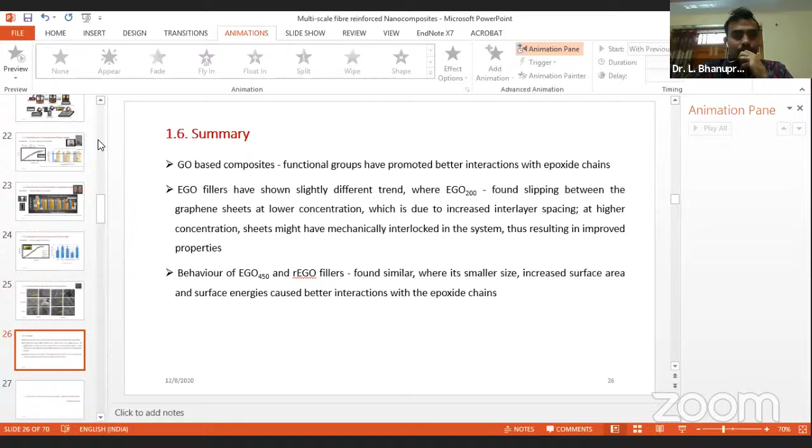I hope I am audible, sir. Yes, sir, you're audible. Okay. Let me share my screen, sir. Is my screen visible? Yes, sir, your screen is visible, we can view it. Okay, so I can go ahead, right?

Yes, sir. So, a very warm welcome and very good morning to every participant. Myself, Dr. Bhanuprakash, and in today's session I will be talking about multi-scale fiber reinforced nanocomposites, especially targeting structural applications.

I hope in yesterday's talk, in the beginning talk, you might have already covered composite materials and their fabrication, different fabrication methods, and all.

I'll be taking you into the research aspects of these nanocomposites, and the possibilities that we have for undertaking research in this particular field, especially looking at structural applications. I'll give you a brief introduction about composite materials, which I hope will be reinforcing your knowledge.

Let me start with the fundamental definition. What is a composite? A composite is a material that is a combination of two or more dissimilar materials which are intimately bonded to form an integrated structure. It's a physical bonding between two dissimilar materials that allows them to form into an integrated structure, which we call a composite material.

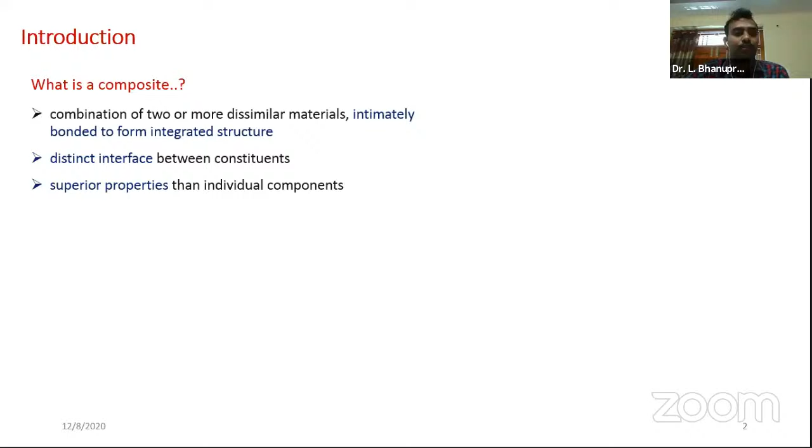That's why we prepare composites. Even if a material individually doesn't have a particular property, when combined with another material, you can achieve that property, so overall the composite will have superior properties than the individual components.

If I show you a microscopic image of a fiber reinforced composite, you can clearly see the binding material, that is the matrix—here a polymer matrix—and the reinforcement, which is the fiber, clearly evident. This reinforcement fiber is bound within a continuous medium called the matrix material, which is a polymer resin. This is a microscopic image of the fiber reinforced polymer composite system, where you can clearly distinguish the individual components—polymer used for binding the reinforcement fibers, forming an integrated structure from two dissimilar materials.

The key point is that the bonding involved here is physical bonding—there are no chemical bonds present in this system. We know chemical bonds are stronger compared to physical bonding. In most composite materials, we can only expect physical bonding between the materials, and wherever chemical bonding is possible and realized in the system, that system will definitely have superior properties or a greater increment in properties.

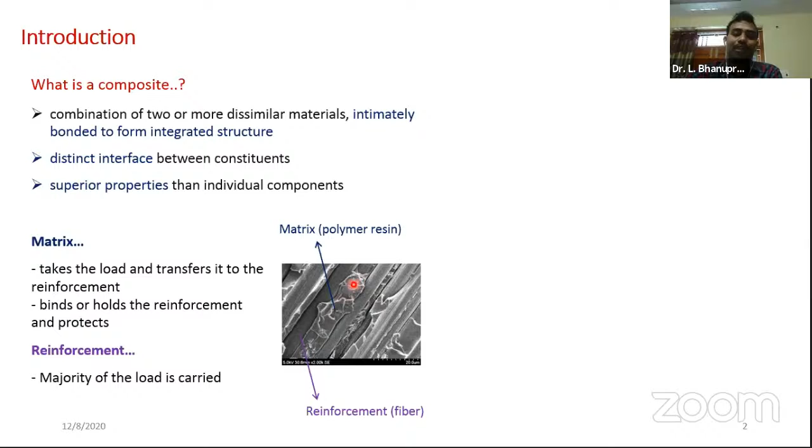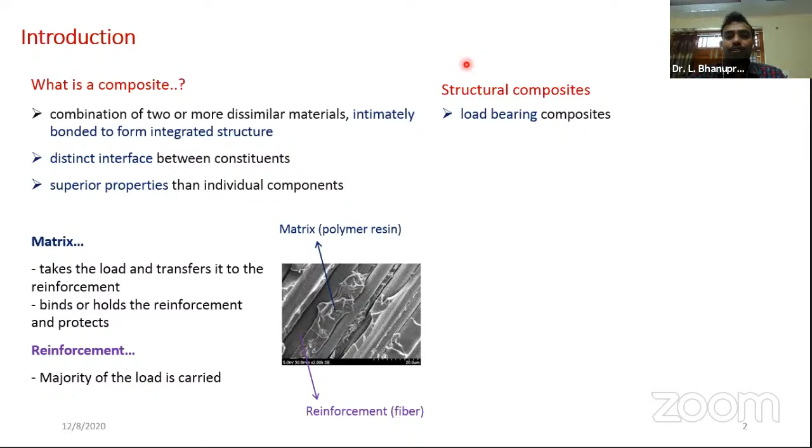And we are talking about their structural applications. So structural composites is nothing but the composite system which takes the load. So whatever the load bearing composites we can say, that is a structural composite system. So I can give you the best example, that is deployable military bridges.

Military people, if they find any obstacle like a river that they have to cross, what they do is use these kind of foldable bridges which are carried over heavy trucks, so that will be deployed at the location, and eventually all the military vehicles will be passing over these bridges. So such a bridge should definitely be lightweight, and also very strong enough to withhold the weights of all these military vehicles.

So there is always a possibility, always so many research opportunities to develop materials which are lighter in weight, and which are very strong in nature. Composites will give you, to some extent or a greater extent, solutions for these kinds of applications. So that's why we use composites.

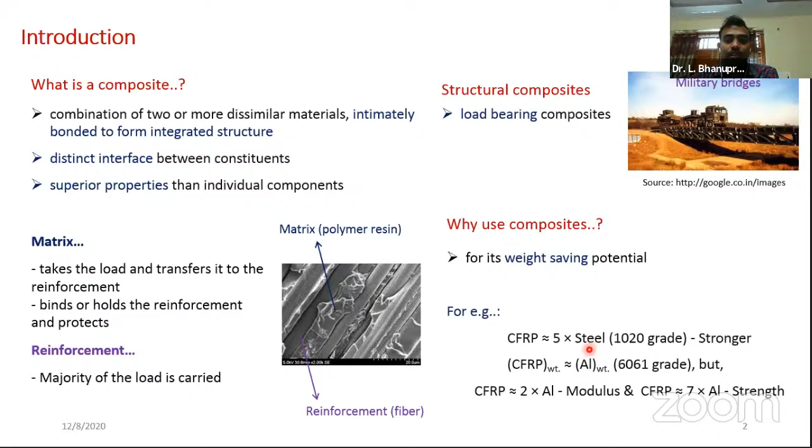So what is the beauty of these composites? The beauty of these composites is its weight saving potential. These composites are very light in weight, and there is no compromise on the strength. If I give you an example, CFRP, that is carbon fiber reinforced plastics - carbon fiber reinforced polymer composites have strength 5 times stronger than steel, 1020 grade steel.

And when you look at the weight aspects, it is comparable with aluminum weight. We know that aluminum is very light in weight. So CFRP composites have very light weight, comparable to aluminum, and in strength aspects it is 5 times stronger than 1020 grade steel. Similarly, comparing properties with respect to aluminum itself, it has 2 times the modulus of aluminum and also 7 times stronger than aluminum material. That is the beauty of these composite materials - a very great weight saving potential in engineering applications.

So if I move on, you know composites is a combination of 2 or more materials, having greater weight saving potential, and it can be used for structural applications. So when exactly can you think of using these composites? We cannot derive these composites into each and every engineering material, we cannot replace all engineering materials with a composite system, because there are many other aspects to consider. I'll come into that.

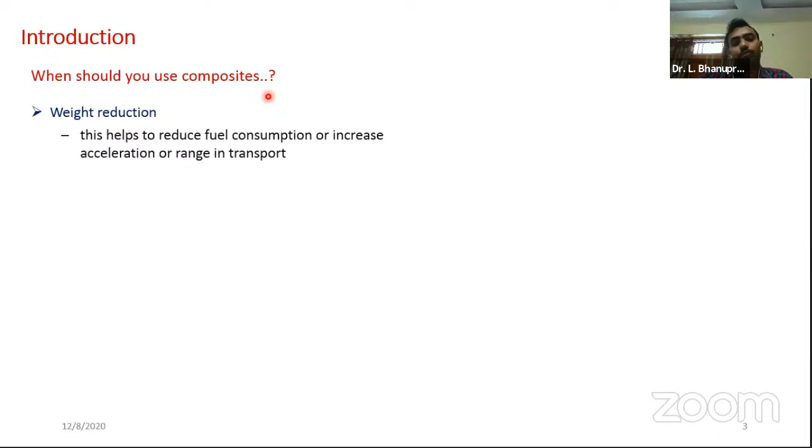So when exactly should you think of using these composites? If I say a few things which are very critical - one parameter very critical in your application is weight reduction. If weight reduction is very critical in your engineering application, then you can think of using these composites. The area where weight reduction is particularly critical is the aerospace sector, and also space applications. This helps in reducing fuel consumption, so it increases the range in transport, or increases the acceleration of your vehicle.

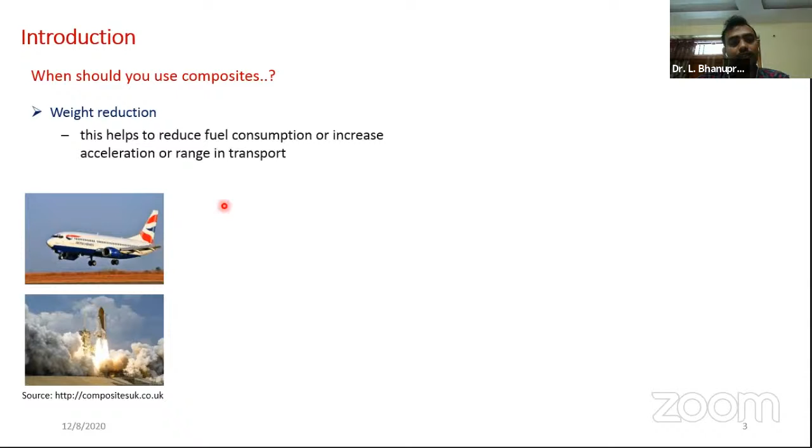The main advantage we get is these panels are ready-made. At the industry, you can fabricate it in a very quick interval. And also, if you're making concrete-based structures, you have to work much more on the digging activities.

The foundation activities are heavy, depending on the structure, depending on the number of floors and all. So here, severe digging and foundation works are not required because it's light in weight materials. Even today, this building is there. If you happen to visit IIT Madras, I'll recommend visiting this building as well. This is one area where weight reduction is very critical, so you can think of using composites.

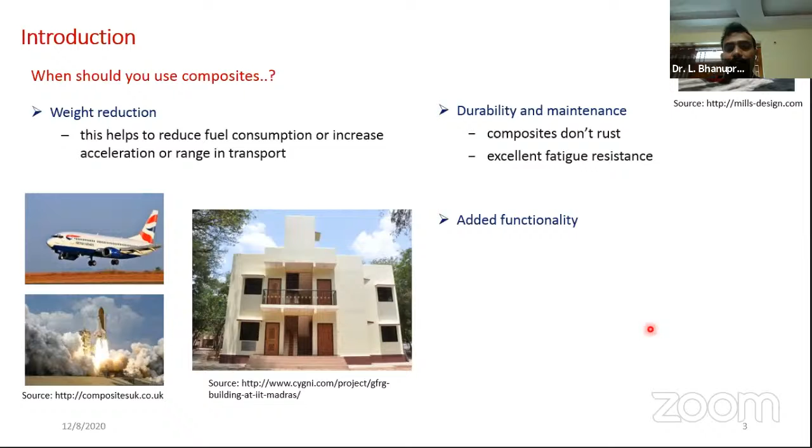Another area is where you're looking at added functionality or multi-functionality to your system. One example is radar applications like stealth aircraft. If you want your aircraft to be invisible, as well as strong and lightweight, you can use composite materials that absorb radar signals. You can incorporate such materials into composites to get radar invisibility. Thermal insulation and electrical insulation are also achievable in this system. So such added functionality you can give to your system, and if you're looking at multifunctionality, you can go with composite materials.

Last but not the least is design freedom. We will have architectural freedom, so you can design your strength in a particular direction. If you want stronger tensile properties in a particular direction, you can orient your fibers in that direction and achieve that. If you clearly know the dynamics of your system, you have the freedom to architect your material. That is the beauty of these composites.

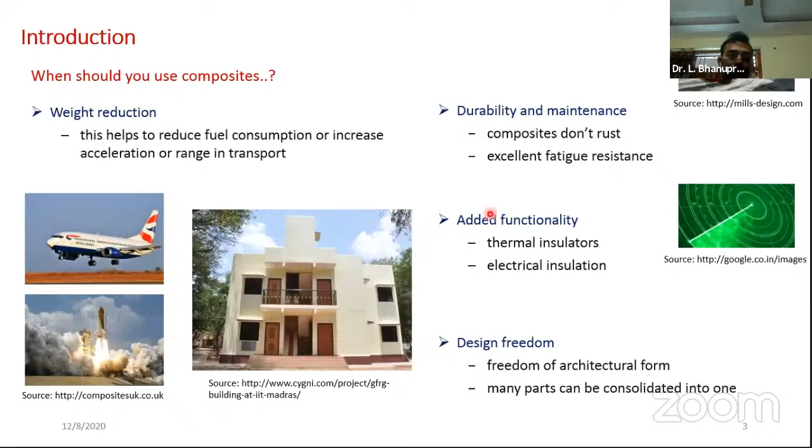So am I teaching you something new? I don't think so. These composites exist in many forms in nature. If I give you a few examples, the best one is wood. Wood is a composite system, a combination of lignin and cellulose material. Lignin and cellulose combine to form wood. So this can be called a composite system.

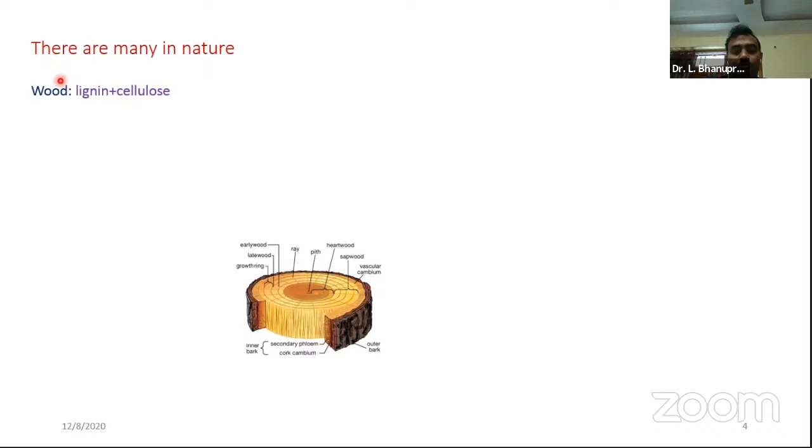Our bones are also a composite system, where bone cells are combined with calcium-based minerals, getting integrated into a structure with good strength. Bones are basically made out of bone cells and calcium-based minerals; altogether these form a composite system. In fact, our human body itself we can call a composite system, made out of tissues and bones. These tissues and bones have physical bonding or binding, but not chemical bonding. So we can call our human body itself a composite system.

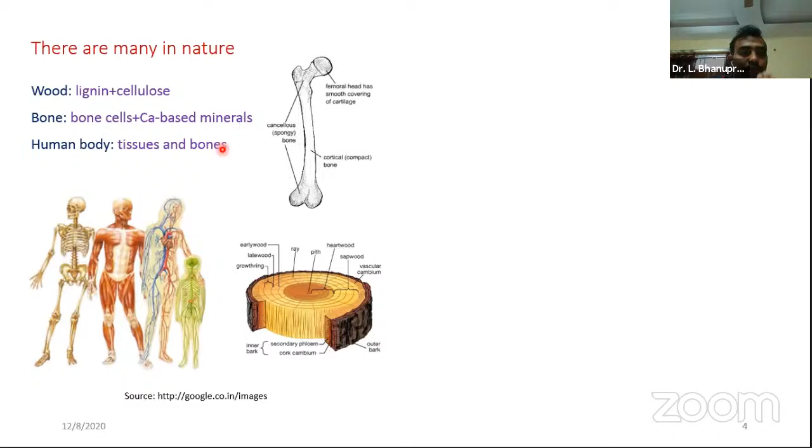So what we are doing is observing nature and trying to mimic it in engineering applications. We are trying to imitate this in all kinds of engineering sectors, starting with construction, transportation, marine, aerospace, energy—virtually all sectors of engineering—we are imitating these composite materials.

Two examples I would like to give you. One is a recent aerospace vehicle, the Boeing 787. On the Boeing 787 website, they clearly mention that 50% of the material they use is advanced composites, so half of its material is fiber reinforced composites.

Depending on the area, wherever mechanical properties are dominant, whether tensile property, compression, or toughness needs to be very high, accordingly we select different types of fibers and add them. But altogether, advanced composites account for 50%.

So half of the materials used come from the composite system, 20% from aluminum, 15% titanium, and 10% steel, especially for landing gear applications. The remaining plastics and other materials make up 5%.

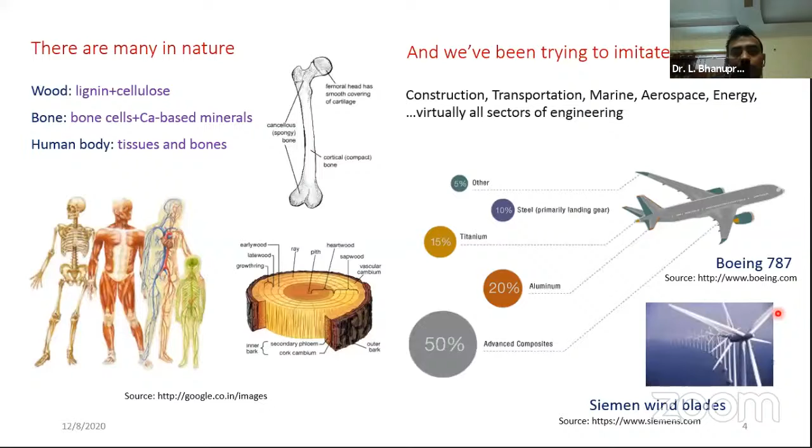Moving ahead, I'll quickly give you the classification of composites. We know a composite is a combination of matrix and reinforcement. Based on the matrix we can classify composites, and based on the reinforcement we can also classify composites. Based on matrix: organic matrix composites, metal matrix composites, and ceramic matrix composites. Under organic matrix composites, we have polymer matrix composites and carbon matrix composites.

Common metal matrix composites include aluminum as the continuous medium, or titanium, magnesium, copper alloys - all can be used as matrix. Into this matrix material we add reinforcement material, so the matrix properties are further improved by adding these additional materials called reinforcements.

Similarly, for the ceramic matrix, oxides and nitrides or carbides are considered - aluminum oxide, silicon nitride, or any carbides can be picked.

Before discussing polymer composites, let's see classification based on reinforcement. We have particulate composites, where the reinforcement is zero-dimensional, that is particles. If you use particles as reinforcement, we call these composites particulate composites.

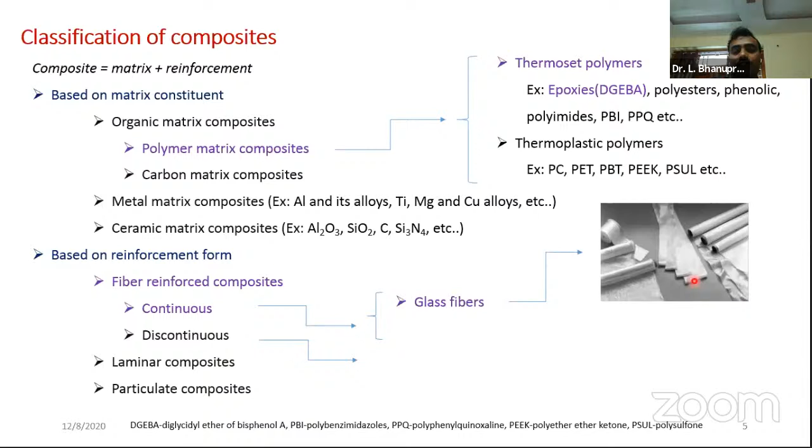Coming to fiber reinforced composites, in most cases for structural applications, continuous fiber is used, whether unidirectional, bidirectional, or three-directional. If it's glass fibers, these are glass fiber sheets or mats you can see.

Carbon fibers will look something like this - it's a two-dimensional or bidirectional carbon fiber, oriented in two directions perpendicular to each other. If it's unidirectional, all fibers are oriented in one particular direction - there is no fiber coming in the opposite direction, at 90 degrees.

We also have a system with discontinuous fibers, called chopped fibers. All these chopped fibers are stacked into one layer, so we call it a mat, or chopped strand mat.

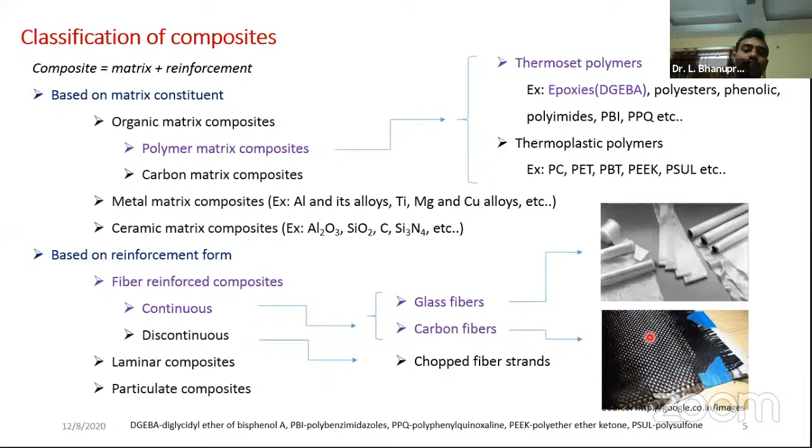These chopped strand mats are expected to have homogeneous properties, but not the continuous system - there, depending on the direction of the fiber, properties will change. If all fibers are oriented in one particular direction, X or Y, the properties in that direction will be very high, but not in the transverse direction. This depends on which type of fiber we use, which depends on the end application - we have to pick the material accordingly.

If you see the fabrication of composites, we have both conventional methods as well as advanced methods. In the conventional methods, I can say we have contact molding or press molding. Under contact molding, a very old and easy technique is called hand layup technique.

We'll be just laying up the fibers, and each fiber, when you lay it up, will be poured with the resin or matrix polymer material, and we'll be rolling it and forming it into the shape of your chosen mold. So it is a very simple process.

Hand layup technique, and spray up is just an automated fabrication method compared to the hand layup technique, where the resin and fiber both will be sent through a pressurized channel.

There is a pipe sending the pressurized resin, and there is a scissoring system as well, where fiber tows will be chopped using the chopping gun. This chopped fiber along with the resin will be sprayed onto the mold surfaces. According to your desired thickness, we'll be applying this resin-fiber system to get the end component.

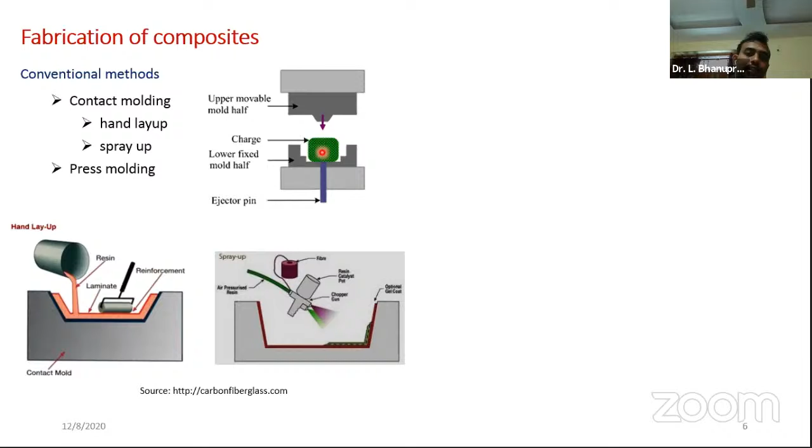And the last one is press molding. We have the female and male mold components. In between, we'll be placing the polymer resin along with the fiber system combined. We'll be applying pressure, and we'll eventually get the end products.

Advantages of these conventional methods: we have easy processing. The steps adopted are very simple and straightforward, and we don't require any trained professional for getting components out of these methods. And these use low cost tooling. No heavy tooling is required. All we are using is low cost tooling.

So these are the advantages we can get, but there are many limitations as well. Mainly, laminates tend to be resin rich. There is no control on the resin that we are applying. Resin is nothing but the polymer matrix.

We know that the ultimate load carrying element in fiber reinforced composites is the reinforcement fibers. The matrix is just a binding material, and it is weak in its properties, so this binding material shouldn't be very high. If you give more binding material and apply the load, this binding material will fail first before it effectively transfers its load to the reinforcement fiber. So before it even transfers the load, it takes a greater amount of strain and fails first before the fibers.

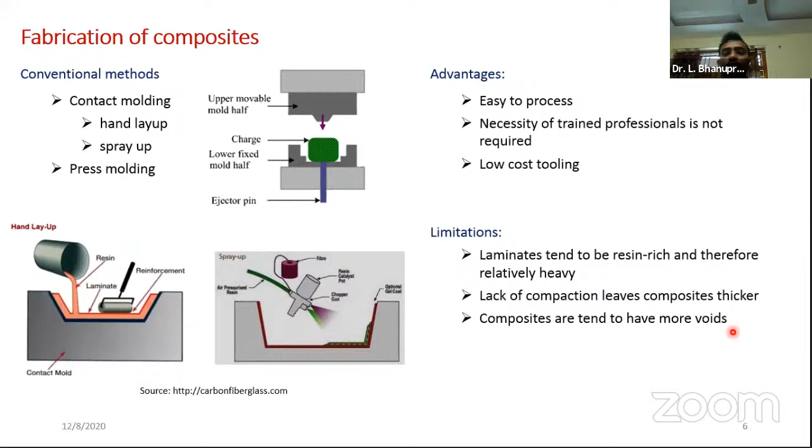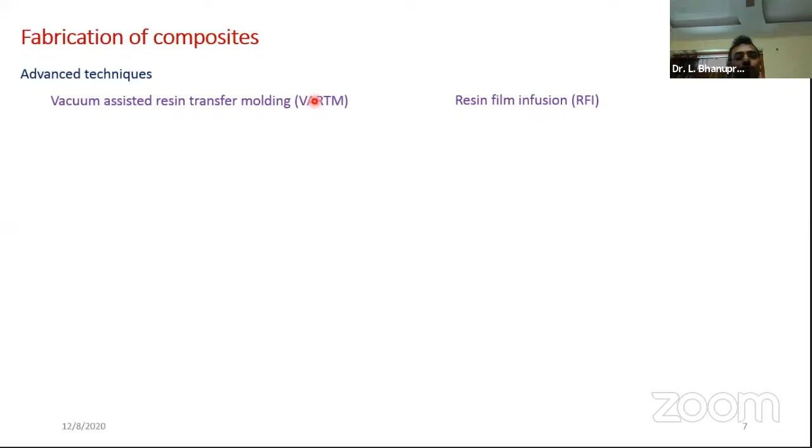And if you go with advanced techniques, we have two I'm going to talk about: one is vacuum assisted resin transfer molding, the other is resin film infusion process. In vacuum assisted resin transfer molding, as the name suggests, the resin will be transferred here. According to our desired thickness, we stack the fiber, and then we seal the material.

This is a vacuum seal. So what we do is we do the two pipings at two ends of these fiber mats. One of this passage will be linked to the resin, that is the polymer matrix, and the other one is to the vacuum pump.

So we create a pressure gradient between one end of the fiber to the other end. If this passage is open to atmospheric pressure, then this end will be at negative pressure, that is vacuum pressure. So a pressure gradient is created, and because of this, resin will be transferred from one end to the other end. So it is basically a vacuum driven resin transfer molding process.

During this process, whatever air is trapped between the fibers will be pushed to the other end point, because smoothly all the resin will be coming from one end to the other end. So wherever any air is present, that will be taken care of by this vacuum hose.

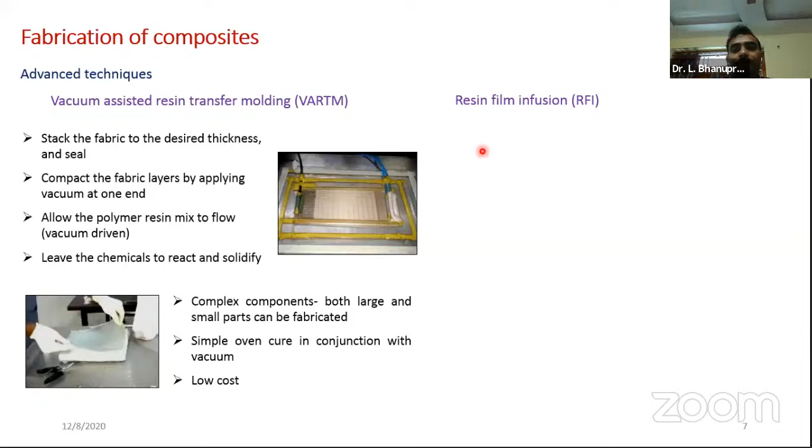When it comes to the resin film infusion process, as the name suggests, resin films have to be manufactured here. In all the cases we discussed earlier, we were considering liquid resin, right? In this resin film infusion, the polymer resin is made into films, just like the fiber mats. These resin films will be fabricated using a calendering process.

The polymer is brought between two rollers and pushed, just like sheet metal processing. The same way, resin films are fabricated initially, and then these fabric and resin film sandwiches are stacked according to your desired thickness. These sandwiches are covered with the bagging material and it is vacuum sealed when put into the oven.

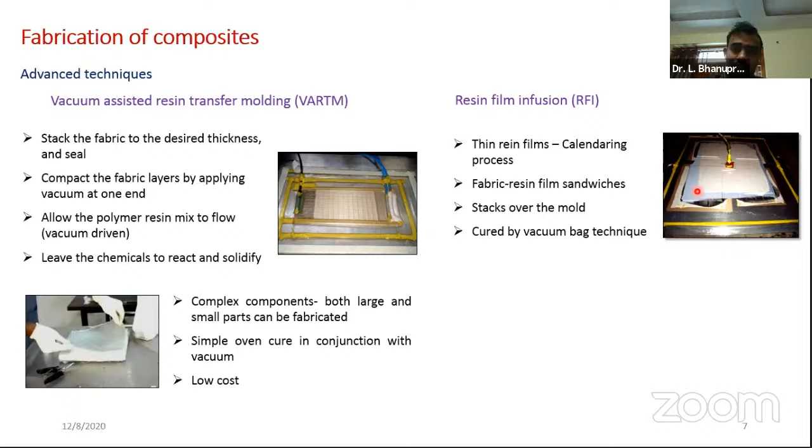So first these films will melt, and then localized flow can be observed here. This localized flow wets the fibers, and we will have excellent control on the resin that is present between the fibers. We'll have greater control on this resin part.

So we will be having very low void fractions, less than 0.5 percent, and we can see greater compaction, so the properties will be very good. This is a calendering equipment, where we can prepare these polymer resin films. So these are the two advanced methods using which we can fabricate fiber reinforced composites.

Coming to the nanocomposites, so far I haven't included the nanoparticles anywhere. We were just talking about matrix and reinforcement, just the polymer matrix and fiber reinforcement. Now I would like to fabricate nanocomposites. So how do I fabricate it? How do I introduce my nanofillers into the system?

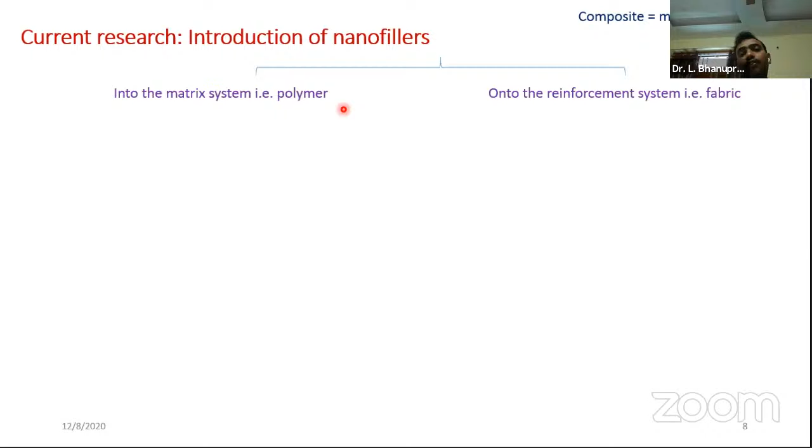Whether I can incorporate it in the matrix, that is the liquid polymer, or whether I can directly bring it onto the reinforcement fibers. As I mentioned, composite is a combination of matrix and reinforcement, so here you can introduce the nanofillers in two different ways. One, you can introduce it into the matrix system, that is the liquid polymer, directly adding the nanofiller powder into the polymer resin. Or you can coat these nanofillers onto the reinforcement fabric system. So in these two ways, you can introduce nanofillers into the composites and fabricate nanocomposites. But what are the major challenges?

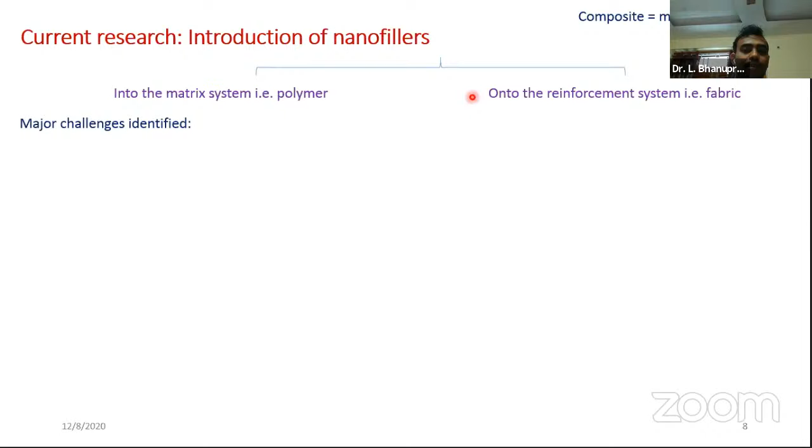So if I go through the literature survey, let me mention the challenges present in these two cases. The first one is the interfacial adhesion between nanofillers and matrix. You will just drop the reinforcement particles, the nanofillers, into your polymer resin. But there should be some kind of interfacial adhesion between the nanofillers and matrix. Only then will you have a connection between the matrix and the reinforcement. So when this interfacial adhesion or connection is not there between the nanofiller and the matrix, what happens?

Whatever load is being applied on the composite first comes onto the matrix, where the nanofillers are dispersed. If the load needs to be transferred to the nanofiller, if you want the nanofillers to also take the load, then there should be a connection between the matrix molecules and the nanofiller atoms.

If it is physical adhesion, or if you can generate chemical bonding between these two, then before the load is transferred onto the reinforcement, some of it will be taken care of by the nanofiller itself, because nanofillers have very good, excellent mechanical and other properties. So some of the load will be taken care of by the nanofiller when it has very good adhesion. So how to develop this physical adhesion, interfacial adhesion, or chemical bonding between the nanofillers and matrix is a greater challenge.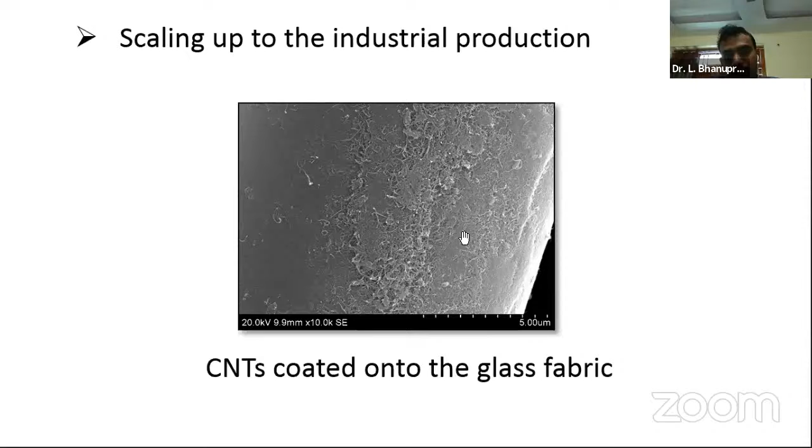If you want to coat the nanofillers instead, here's an example: these are CNTs, carbon nanotubes, dispersed in the epoxy resin. They are separated from one another, there's no agglomeration here — it's nicely, homogeneously dispersed in the matrix system. If I want to achieve the same thing on the reinforcement fiber, you can see in this image all the carbon nanotubes nicely coated on the fiber surfaces — these are carbon nanotubes coated onto glass fiber surfaces.

So when you are doing this, the challenge is the controlled production of nanofiller-coated reinforcement fibers. Producing these coated fibers is a challenge first of all. And even if you do it at the lab level, bringing it to industrial scale — preparing these coated fibers at tons of lengths and scaling into industrial production — is very critical and very challenging. So these are the two fundamental challenges we see in coated reinforcement fibers.

However, there are some techniques. Researchers are working on it, and I'll talk about a few cases in both ways. First, let me talk about the matrix being modified with the nanofillers. There are a number of routes.

You can add your nanofillers directly into the organic solvent, or into your polymer material. Eventually you get a polymer matrix modified with the nanofillers. We know that polymer matrix is viscous in nature, like honey. So when you add solid particles like nanofillers into this viscous medium, the viscosity increases further, and you won't get good dispersion or distribution. That becomes very critical.

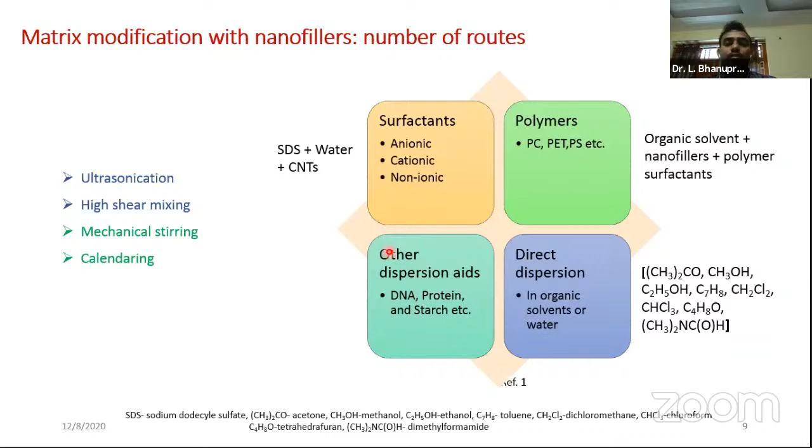Or there is another method where we use surfactants, called the functionalization method, which I'll talk more about. Other dispersion aids like DNA, protein, or starch can act as coupling agents between your nanofiller and the polymer. So these are three different ways.

Another approach is chemical functionalization, where you modify the nanofiller surfaces with active functional groups, and these functional groups link with your polymer. For example, if I pick epoxy resin, it requires an amine-based hardener. The resin is your polymer system, and the hardener is an amine-based solution, meaning NH2 groups are present.

If these NH2 groups are generated on the nanofillers, on the nanotubes here, they will bind with the polymer, introducing a chemical bond between the polymer and nanofillers. If you achieve this chemical bonding, whatever load is acted on the matrix will be effectively transferred onto the nanofillers, and eventually the properties of the material will increase.

So functionalization can be classified into two types: covalent functionalization and non-covalent functionalization. Covalent means you introduce covalent bonds between the functional group and the nanofiller.

So here it is the direct and indirect method. One is indirect, where wherever a defect region is there, you will be attacking over there. Direct side wall is you will be attacking onto the regular atomic structure, modifying the regular atomic structure.

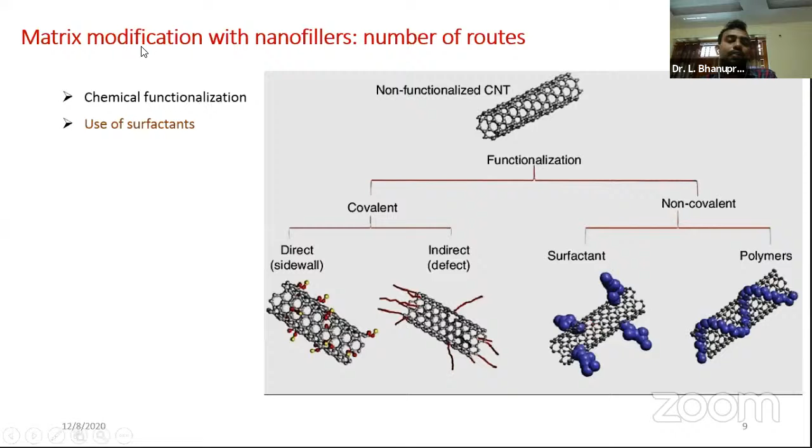And if you see the reinforcement modification methods, so reinforcement modification with nanofillers, what are the different routes there. First one, directly we can grow the nanofillers onto the fiber surfaces. During production of nanofillers itself, whatever you produce, you produce this nanofiller directly onto the fiber surfaces.

So in that regard, what they do is carbon nanotubes will be generated on a particular substrate. The substrate will be coated with some metal oxides. This metal oxide will act as a precursor material, and over those metal oxide particles, these nanotubes will be growing, in the CVD, chemical vapor deposition process.

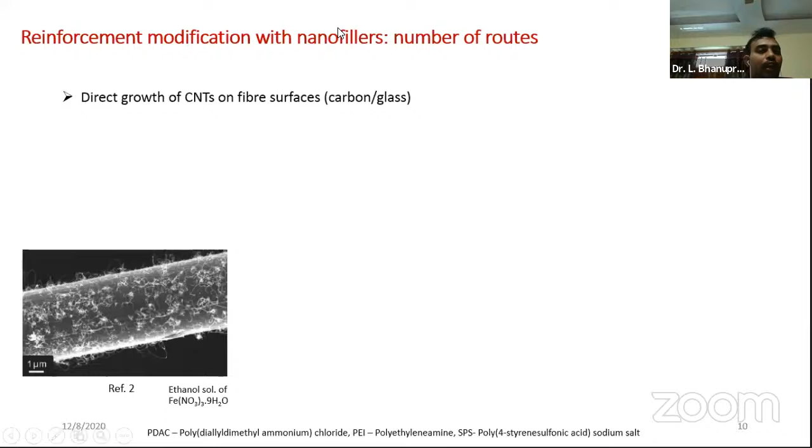So instead of using a regular substrate, what they do is they will use the fiber as a substrate. Onto this fiber, first a metal oxide will be coated onto the fiber surfaces, and wherever metal oxide is present, that will be the route for growing these carbon nanotubes. So like that, directly you can grow the CNTs onto the fiber surfaces, and that's how you can introduce nanofillers onto the reinforcement fibers.

Second one, we have electrophoretic deposition of CNTs onto the fiber surfaces. Electrophoretic deposition is nothing but similar to the electrolysis process, where charged ions will be moved onto the electrodes, deposited onto the electrodes.

So here also, but here we will be using charged particles. Charged particles will be dispersed in a solution, whether it can be organic solvent or water also. So first, if you're talking about nanocomposites, nanotubes will be introduced into the water solution or the ethanol solution, and they will be nicely dispersed. Then we will be taking two electrodes, and in front of any one of the electrodes, these charged particles will be depositing.

So we'll be just placing these fibers in front of any electrode, if it is a glass fiber. If it is a carbon fiber, we know it is a conducting fiber, so that directly it can be used as an electrode. Charged particles will be getting deposited onto the electrodes. So that is the electrophoretic deposition technique. That is how we can coat the fibers.

Third one, we have CNT dispersed in polymer blend that is used as a sizing. We know that all the fibers will be treated with some kind of sizing agents. When you're applying the sizing during its manufacturing process itself, that sizing material will be dispersed with the CNT blended polymers, so it will be having some kind of charge. The carbon fiber's sizing will be created with the anionic charge, and if you are coated with the cationic, both anion and cation will bind together, and that's how you will have adhesion of these fibers. You can coat the fiber surfaces with the nanotubes.

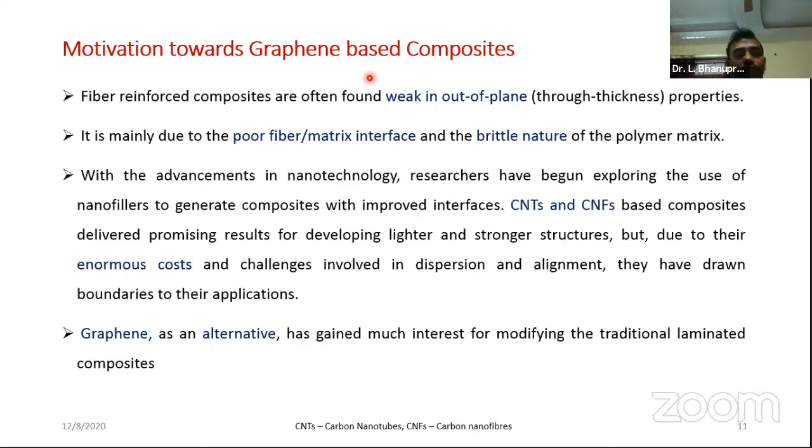And during my doctoral thesis, I worked on graphene-based composites, both in the matrix modified system as well as the reinforcement modified system. Graphene has different derivatives - the pure graphene, as well as oxide form and exfoliated form. I have explored each and every case.

My work has been divided into three categories. First, I worked at the nanocomposite level, where nanofillers are directly introduced into the epoxy resin, and I studied the mechanical properties. From this work, I could know the concentrations of nanofiller I can add, what are the maximum concentrations, and what is the optimum range of nanofillers at which I can expect improvement in the properties, or whether I can notice any improvement at all.

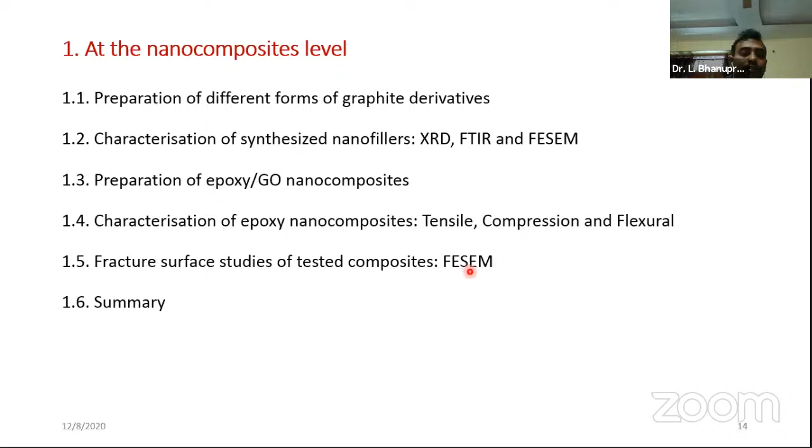We characterized using XRD (X-ray diffraction), FTIR (Fourier transform infrared spectrum), and FESEM (field emission scanning electron microscopy). From these three techniques, we confirmed the oxidation followed by the exfoliation and reduction processes. Then we adopted the method for generating the nanocomposites, prepared and characterized them for tensile, compression, and flexural properties. We studied their fracture surfaces to evaluate the dispersion of the nanofillers in the system, as well as the kind of fracture involved in the specimens.

First, oxidation is carried out through the modified Hummers' method. Hummers is the first person who did the oxidation of graphite, in 1958, using three oxidizing agents: sodium nitrate, sulfuric acid, and potassium permanganate (KMnO4).

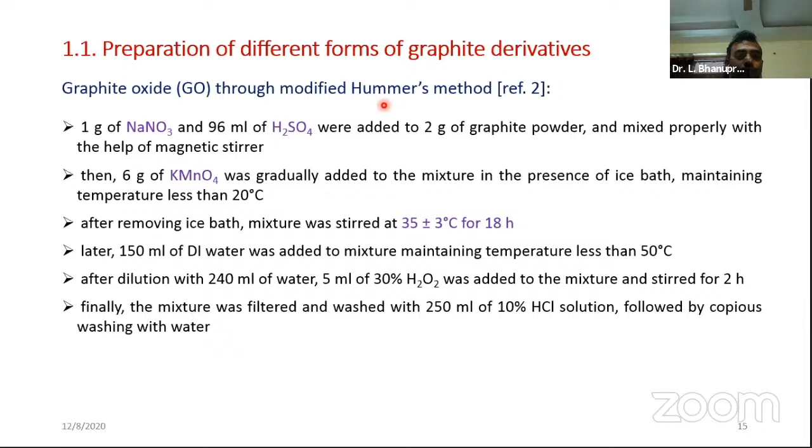Using these three strong oxidizers, graphite is being oxidized, and graphite oxide will be generated. People have optimized this Hummer's method, and the advanced, latest optimized technique is being adopted for my work.

From the graphite oxides, we have thermally exfoliated the graphite oxide in two ways: by suddenly heating it at 200 degrees centigrade, and by gradually heating up to 450 degrees centigrade. In two ways we have exfoliated it.

Finally we have chemically reduced it to bring it into graphene shape, graphene nanoparticles, using a strong reducing agent, that is hydrazine hydrate.

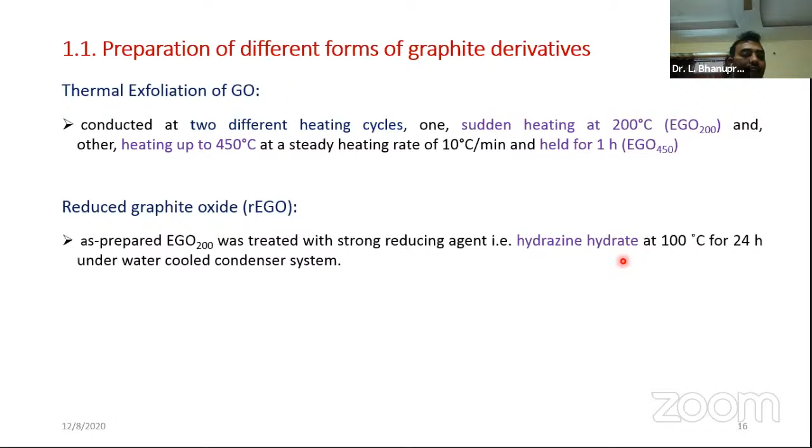But when it is oxidized, these graphite flakes have at least 600 to 800, maybe up to 1,000, stacks of graphene sheets, and we call that graphite. Graphite is nothing but a stack of graphene layers. Graphene is a single layer of carbon atoms, a hexagonal network of carbon atoms. Such single layers are stacked together; if 500 to 800 graphene sheets are stacked, we call that graphite.

So during the oxidation process, this stacking of graphene sheets is broken because of the acid treatment, sulfuric acid and other strong oxidizing agents. These sheets are broken, and oxygen groups like hydroxyl groups are introduced between these graphene sheets.

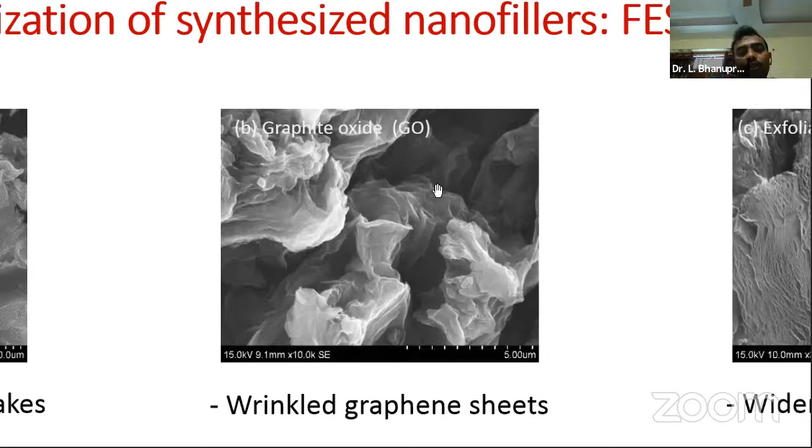This is the SEM image for the graphite oxide. You can clearly see the stacking is reduced, meaning the size of the graphene is reduced here. So the magnification also increases; we have to go deeper to analyze the component, to 10K magnification, whereas here it was 3K magnification.

Then we have exfoliated at 200 degrees centigrade. Suddenly this graphite oxide is brought to 200 degrees centigrade. Because of that sudden change, all the oxides present in the graphene sheets are removed. As a result, it exerts some kind of pressure between the sheets, and the sheets expand. You can see many expanded sheets, so consider this a stack of 100 sheets, maybe less.

In each and every case, I can say this is a single graphene sheet. Each graphene sheet is pushed away a bit because of the pressure exerted. However, wherever possible, it is also broken, so the size of the graphene sheet here, the exfoliated graphite oxide, is further reduced.

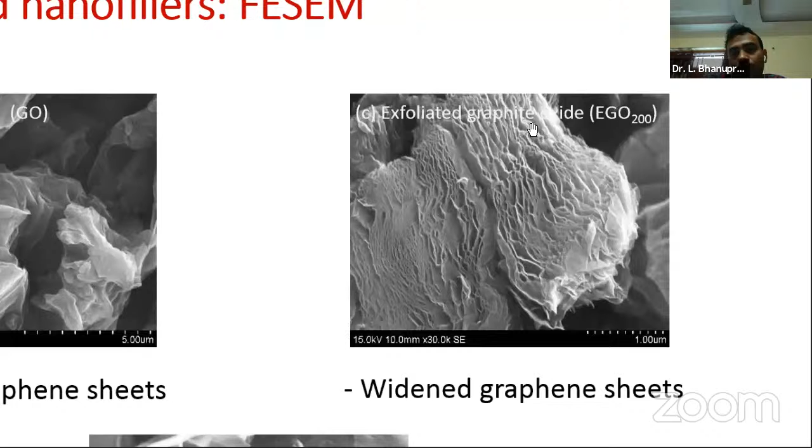In the previous case, the graphite oxide, it was observed at 10K magnification, but to observe this exfoliated graphite oxide, I have to go deeper, to 30K magnification.

Similarly, exfoliation at 450 degrees also resulted in a similar structure, but we cannot see sudden expansion because this is gradually heated to 450 degrees centigrade. It's not a sudden change, not a sudden thermal gradient, not sudden heating.

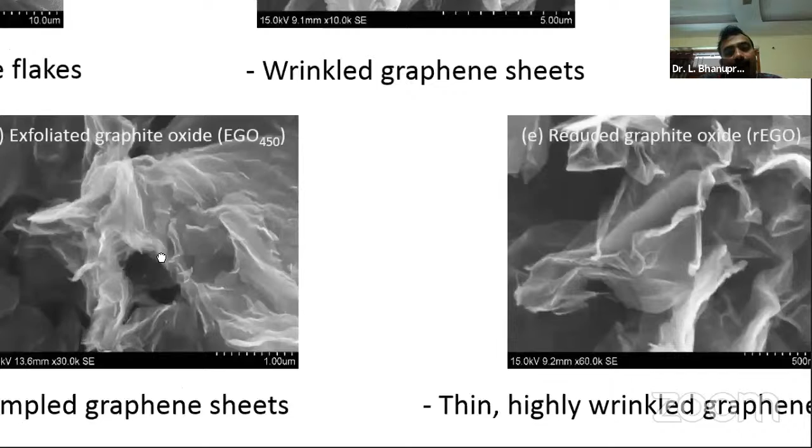Eventually these sheets are crumpled on the surfaces, which can be noticed here. When it is reduced using the reduction technique, using the strong reducing agent like hydrazine hydrate, all the oxygen groups are removed.

As a result, these stacks are further broken into very few sheets, like 5 to 8 sheets combined, or sometimes even a single sheet can be noticed. Here you can see a beautiful transparent graphene sheet, and even the folding of the edges, I can clearly notice my graphene flakes.

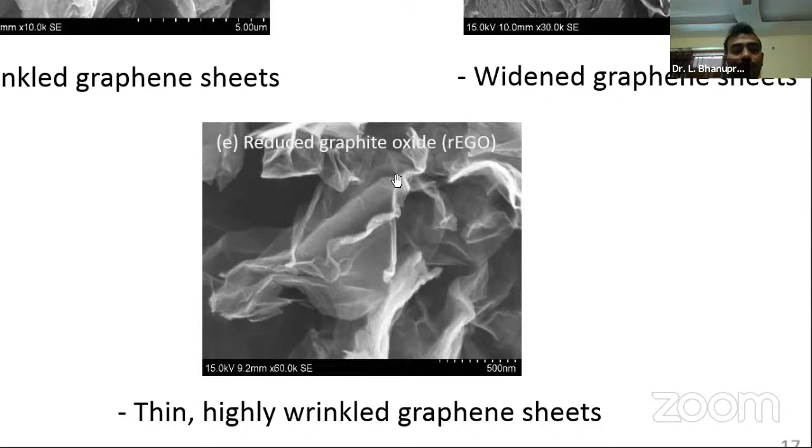When the reduction happens further, the material size reduces, so I have to look at 60,000 magnification in order to capture the filler. This indicates that a breakdown is happening from the graphite, which is 500 to 800 graphene sheets stacked together.

When oxidation is done and it is treated with acids, it is broken into maybe half or so, and further when it is exfoliated, again it is broken down. When it comes to the reduction process, finally it is somewhere around less than 5 graphene sheets. In some areas we can even pick one single graphene sheet. So these are the different derivatives.

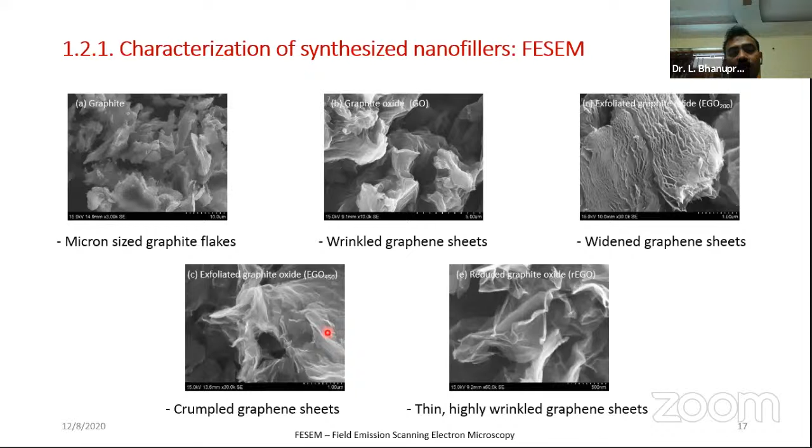All these different derivatives are being observed for nanocomposites. So which one is good for increasing the properties? That is what my study is about.

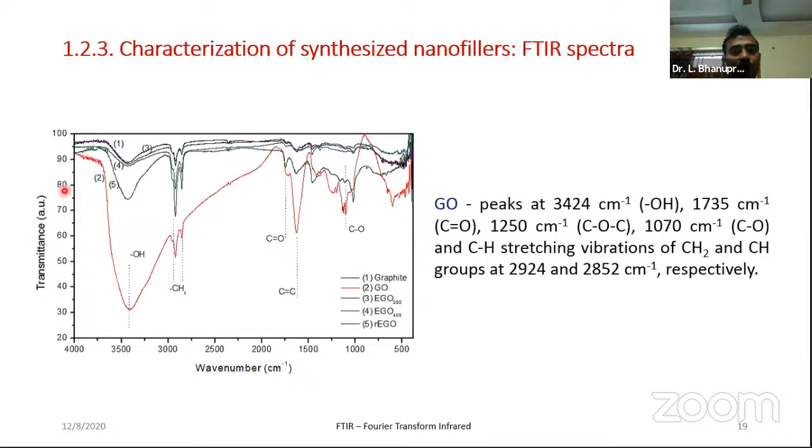The functional groups present can be confirmed from the FTIR spectra. Upon oxidation, carboxyl groups, carbonyl groups, and hydroxyl groups are all observed in this FTIR spectra. When they are exfoliated and reduction has been done, all these groups are removed and the peaks slowly disappear. That has been clearly observed here.

I have followed the solvent-assisted ultrasonication method here, using organic solvents. First, I dispersed nanofillers into different organic solvents like acetone, chloroform, DMF, methanol, methyl ethyl ketone, and tetrahydrofuran - six different organic solvents. I prepared the graphene dispersions.

I observed it for 24 hours. After 24 hours, the solution in acetone had the graphene settled down; chloroform to some extent is okay; DMF gives a very good dispersion even after 24 hours with nanofillers not settling down; methanol and methyl ethyl ketone also settled down the particles; and THF also gives good dispersion. So DMF and THF is my conclusion.

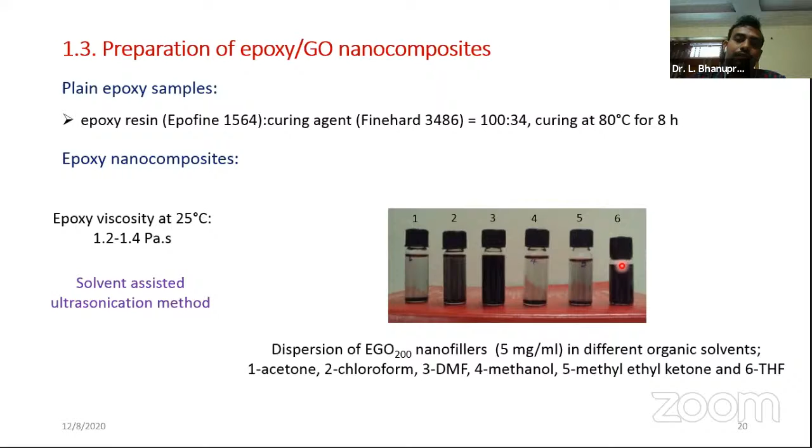I can go with either of these organic solvents, but DMF has a very high boiling point compared to THF, which is only up to 70 degrees centigrade or 65 degrees centigrade boiling point. So I can easily remove this THF. I picked THF as my organic solvent, and first I dispersed all the nanofillers in the THF, and that solution is eventually transferred into the...

Epoxy resin - epoxy is my matrix material, polymer matrix here. First graphite oxide is added to the THF and we sonicate using an ultrasonic probe. Once uniform dispersion is achieved, this solution is added to the epoxy resin solution, and again I disperse this using sonication.

Afterwards, once sonication is achieved, I have to remove the organic solvent. During that, both mechanical stirring as well as a hot plate are used, set at 70 degrees centigrade. At this point, the organic solvent will be evaporated, and eventually we get epoxy.

Once you get this epoxy and nanofiller dispersion, we pour it into mold surfaces to generate the tensile test specimens. For tensile specimens, we have the dog-bone specimen, something like this - this is a mold. We just pour it and then cure it.

For the compression test, you need to prepare a cylindrical specimen, and for the flexural bending samples, you need to prepare a rectangular specimen. So in each case, we have different molds. The prepared epoxy resin system is poured into different cases, and composite specimens are prepared and tested for all these properties - flexural strength, bending strength, and so on.

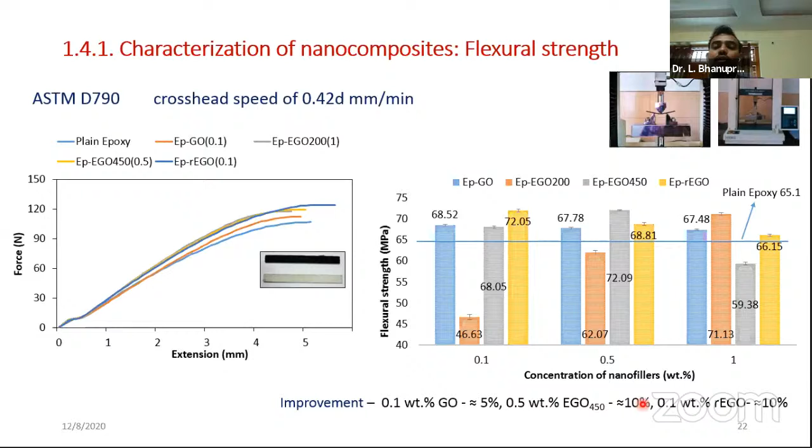We have noticed a good improvement, a good sign at the nanocomposite level. We have noticed improvement with the reduced exfoliated graphite oxide - REGO and EGO exfoliated case - a 10% improvement is noticed. In compression also, we have noticed up to 15% improvement with the exfoliated graphite oxide. And there is no effect on the tensile properties.

That is evident because to improve any tensile property, you always require covalent bonds between the filler and matrix material. If there is no covalent bond, when the material is pulled under tensile loading, the load will not be transferred onto the nanofiller.

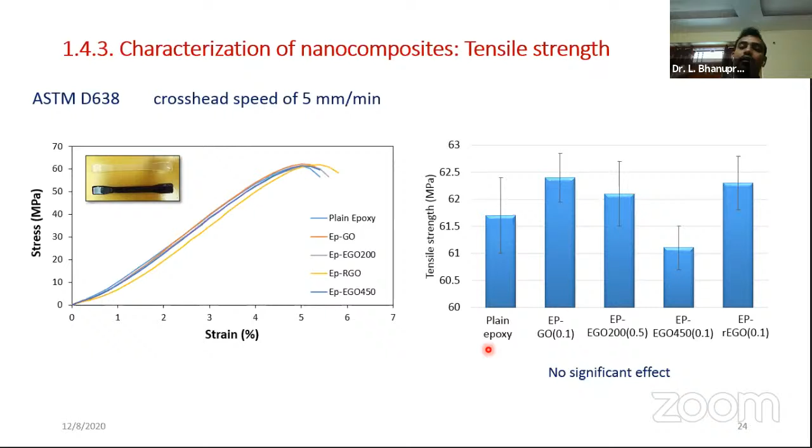So nanofiller will not be participating under this tensile load. Wherever nanofiller is there, it acts like a stress concentration region only. So eventually either the properties will reduce or it will remain the same. So we didn't expect any improvement in this tensile property here.

And we have seen the fracture surface images, and we could notice at one weight percentage of nanofiller combination, very high amount of agglomerations. When it is at low concentration, you can see very nice homogeneous dispersions. When it is one weight percentage, clumsy clusters of agglomerated nanofillers are observed. So in further experiments, we have not used 1 weight percentage. We have restricted our experiments to less than 0.5 weight percentage.

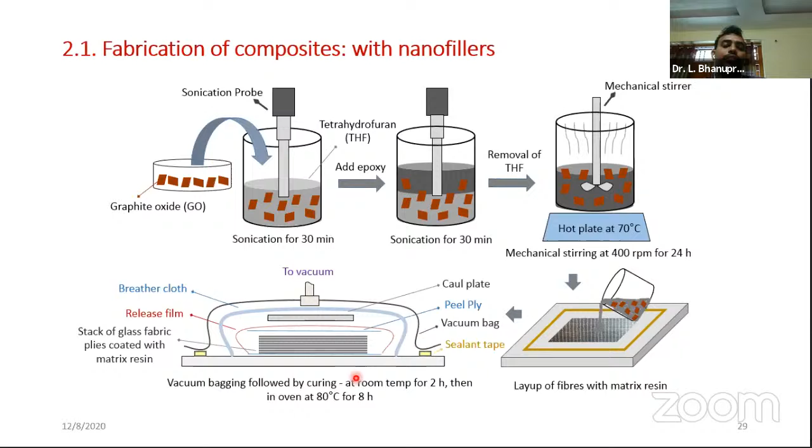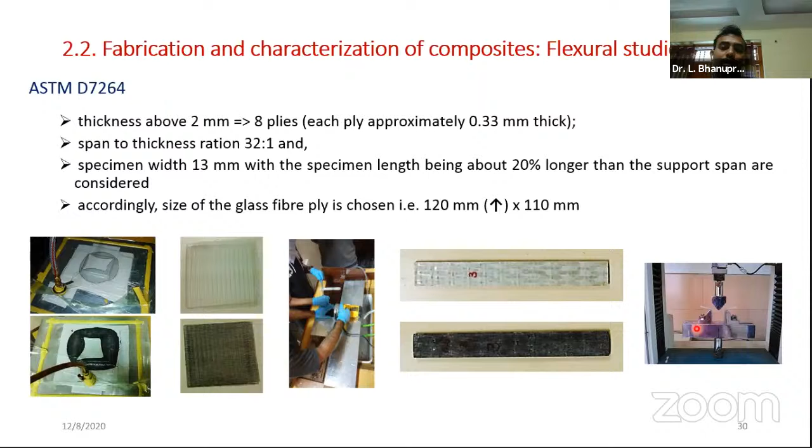Then we moved on and fabricated fiber reinforced composites using vacuum bagging technique. These are the vacuum bagging components. We have studied flexural properties according to the ASTM standards. We prepared the samples and cut them into the desired rectangular shapes. These are the laminates cut into shape, and we have tested them under a 3-point bend fixture.

According to the ASTM standards, we calculated both the flexural strength and the modulus, and we could notice a very good improvement at the fiber reinforced composite level, up to 44% improvement in strength, and also the modulus was improved.

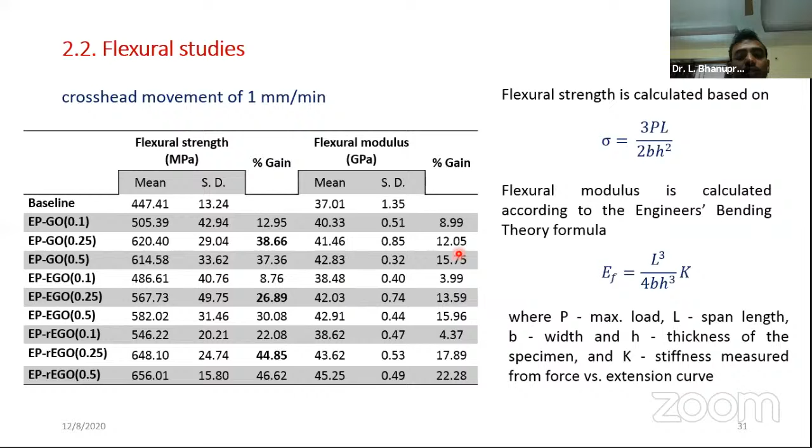Similarly, interlaminar shear strength has also been tested, and it is a very critical study. This interlaminar shear indicates the bonding strength between the fiber and the matrix. That is also improved with the presence of nanofillers. Nanofillers have promoted the bonding between matrix and reinforcement, where we could notice 48% improvement with RGO at a very low concentration of 0.25%.

Similarly, we have done very interesting studies here: mode 1 and mode 2 fracture studies. Mode 1 is an opening mode fracture, just like the tensile mode fracture. First we have introduced a film pre-crack. This is nothing but the pre-crack. Wherever this film is there, there will be no bonding between the fibers, so this can be treated as a pre-crack. Up to this region, there is a pre-crack, so freely the sample will open up.

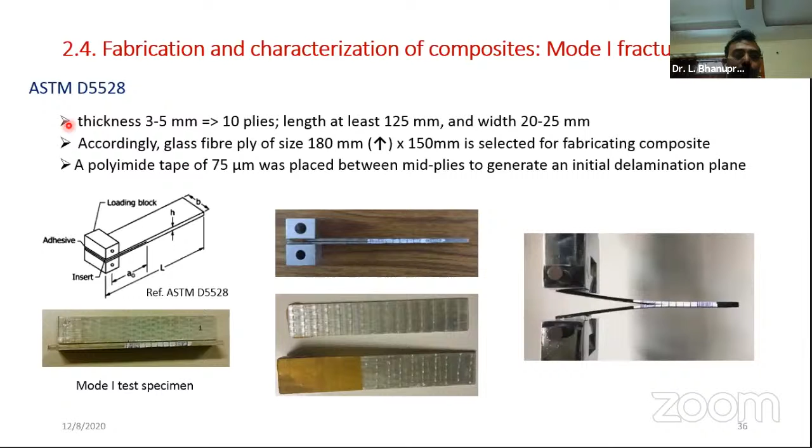At the tip of this film, the bonding needs to overcome the bond strength. That is the fracture toughness, the resistance offered against crack propagation. So crack initiation as well as crack propagation, both things have been covered, as per the ASTM D5528 standard we have followed this test.

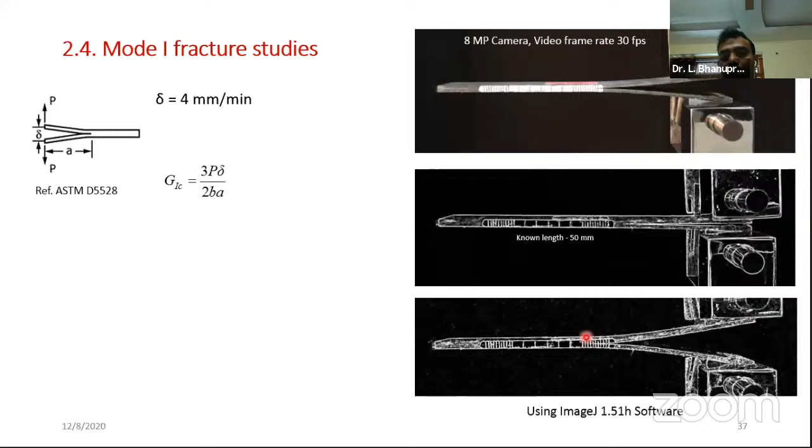This has been captured using a camera, an 8MP camera, and then the video has been split into a number of frames. We have clearly studied the propagation of the crack using ImageJ software. Each and every frame has been clearly observed for crack propagation, and we have drawn the graph between crack propagation and crack initiation. Both the initiation fracture toughness and propagation fracture toughness have been calculated.

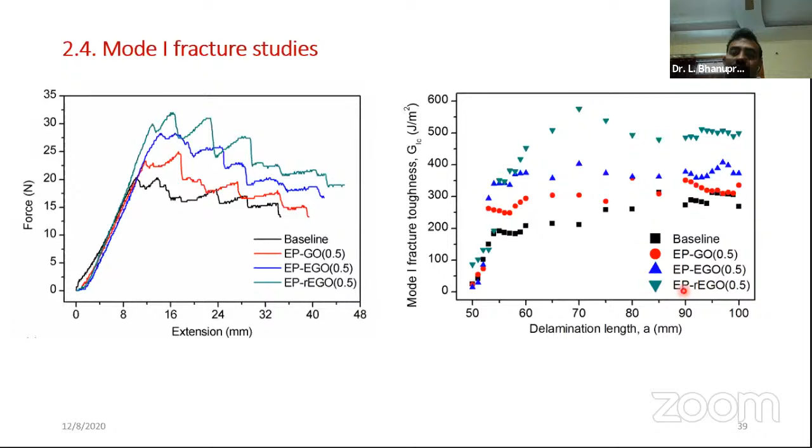And here also we have observed a very good improvement in the properties. At 0.5% we can notice 65% improvement, at 0.25% it is 48% improvement. Propagation is higher further, but in most cases initiation is considered the fracture toughness, and that is also very high, we have observed. The extension, that is the delamination length or crack length, versus the mode I fracture toughness is drawn here. This is the baseline, and very good improvement can be noticed with reduced EGO.

And we have observed very good strength with respect to the rEGO, clearly observed in the fracture surfaces also. The binding between the resin, that is the polymer, and the fiber is very, very tight here.

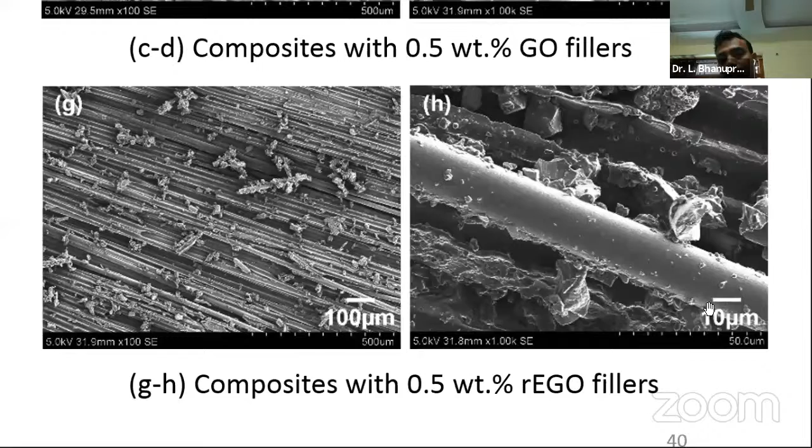See, all the fiber surfaces are having matrix material along with your nano fillers, right? So these are all nano fillers. They are tightly bound here. So this is what is promoting the strength. This is what is causing the improvement in the properties.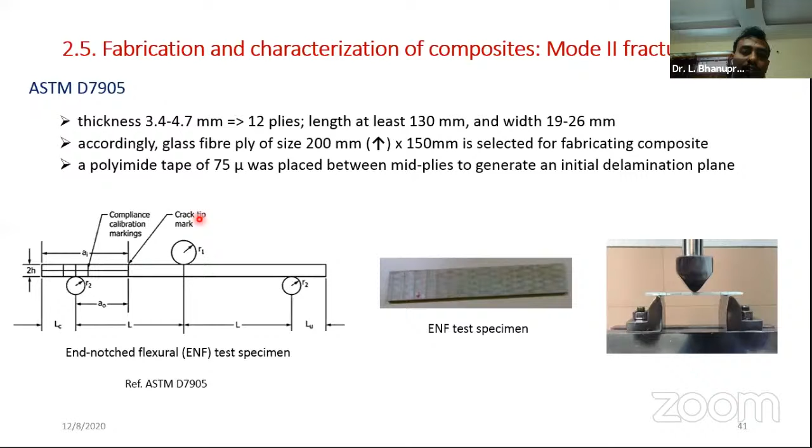And similarly, the mode 2 fracture, it is a shear fracture, we can say. So it is tested under the flexural conditions, 3-point bending load condition. We have tested it in a similar way, and we have noticed a very good improvement as well.

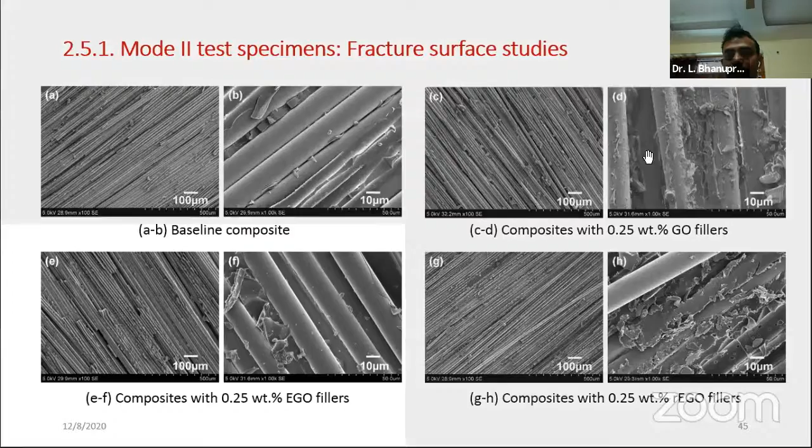The nanofiller dispersion has been studied. Also, the fiber surfaces here also you can see. These are the clean fiber surfaces in the baseline composite without nanofillers. Fiber surfaces are very clean. And you see with the GO as well as REGO, see how the fibers are being tightly wrapped up with the matrix material because of the presence of nanofillers. See the layer of matrix that has been tightly adhered onto the fibers. So that is how the physical bonding is being improved with the presence of nanofillers.

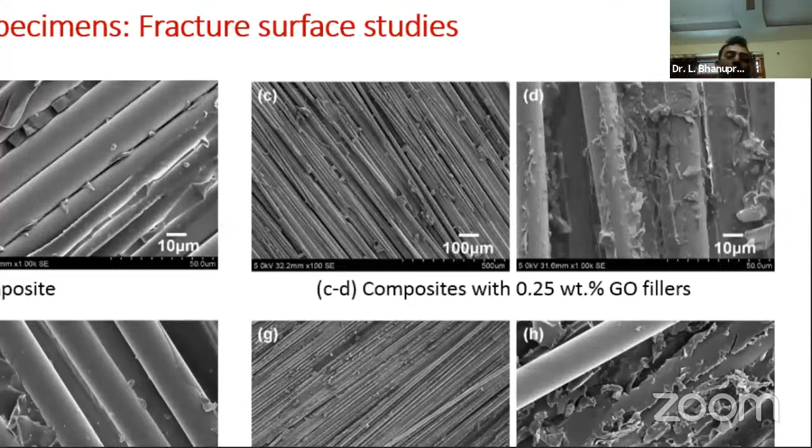And this work has been published in Polymer Composites, and it has already received more than 10 citations.

And for the next one, I have modified the reinforcement fiber systems with the nanofiller. In this regard, I have studied with the carbon fiber system. I have considered electrophoretic deposition as a method for modifying the reinforcement. For that, I require electrodes which are conducting, so I have chosen carbon fibers as my conducting electrodes.

So this is the setup here. You will be having a DC power supply, and you have the two electrodes. Between that, your fiber will be there. Between this positive and negative electrode, the negative electrode is the cathode, and the anode is your fiber. So on both sides of the fiber, the nanofillers are being coated. The charged particles will be deposited onto the anode electrode, which here is the carbon fiber.

So if I use only one electrode, one side only gets coated, and the other side remains plain. So on both sides I have used cathode electrodes. So on both sides, my carbon fiber is deposited with the nanofillers.

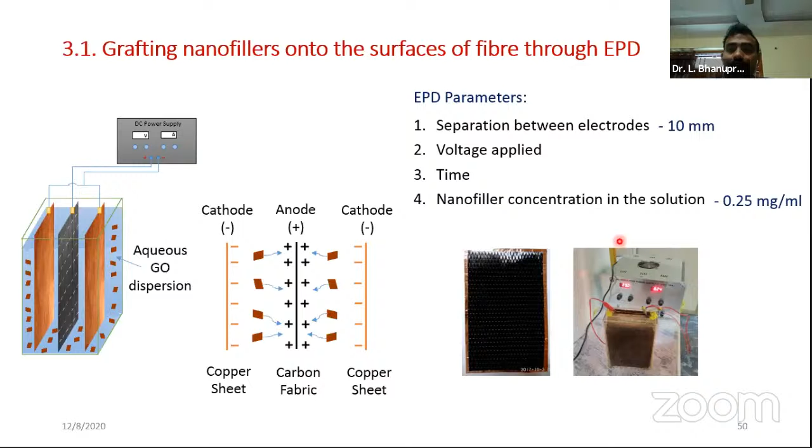So nanofiller concentration I have fixed at 0.25 mg per ml. Then first I have optimized the voltage that is needed and the time to follow. I have tried different combinations like 20 volts and 10 minutes, 20 volts and 20 minutes, 40 volts and 10 minutes, and other cases. I have analyzed under microscopic images for the thickness, and I found 20 volts and 20 minutes gives me uniform deposition, so I have followed this and fixed these two parameters as well.

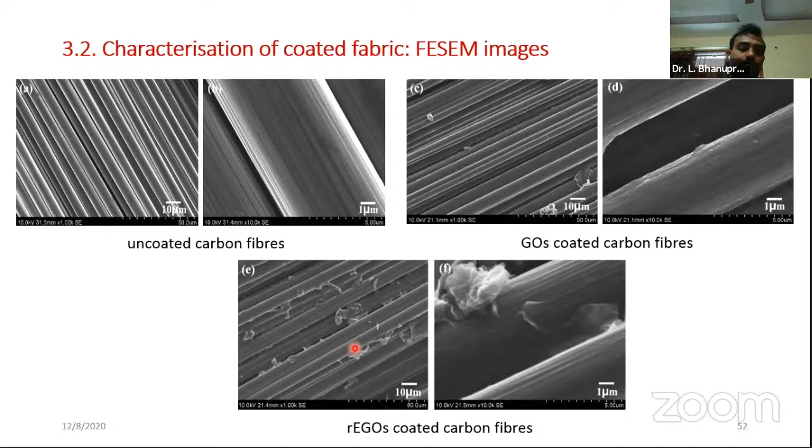And I have coated with GO and REGO, two cases here. EGO I have eliminated. So graphene oxide and reduced exfoliated graphene oxide have been considered for the experiments.

So first I have deposited in the same way. Then the first test I have done is a contact angle measurement. This is an indication of your surface roughness. It is expected that when nanofillers are present on the surface, the surface roughness will be increasing. If the surface roughness is increasing, you have to observe a reduction in the contact angle. So we have done the experiments, and we have also confirmed the reduction in the contact angle.

Uncoated carbon fibers have a contact angle of 38 degrees, whereas graphene oxide coated carbon fibers are at 28 degrees, and reduced graphene oxide (RGO) coated ones have a 30-degree contact angle. So there is a reduction in contact angle that has been observed.

This reduction is due to the increase in surface roughness, giving very good wetting with respect to the polymer matrix. If you improve the wetting, you can improve the physical adhesion between the matrix and reinforcement. So first we have confirmed that.

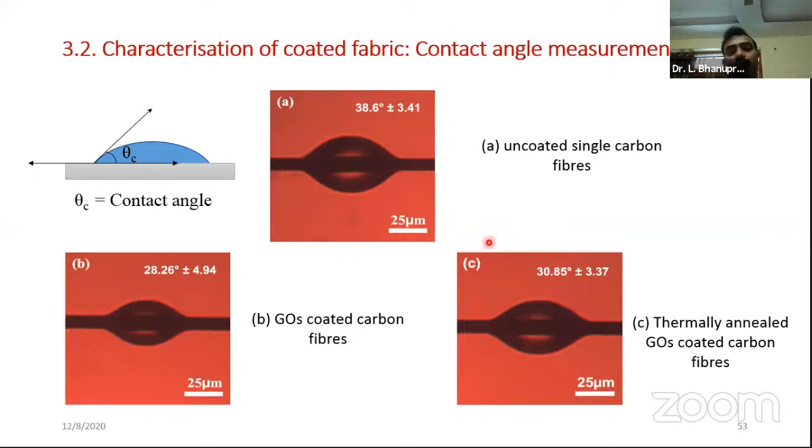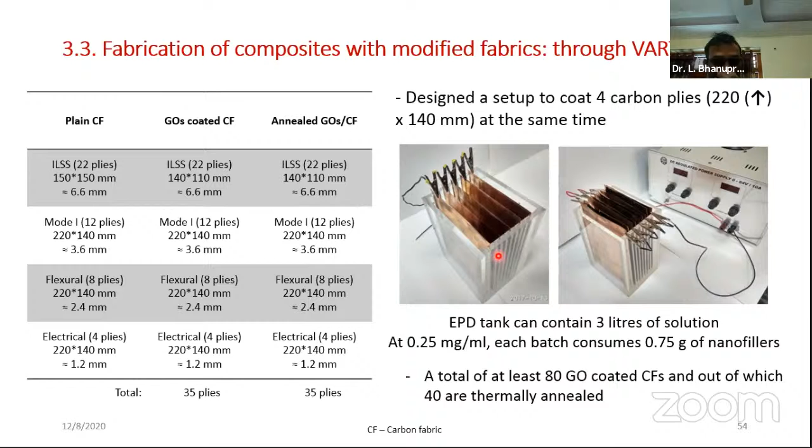Then, in order to do multiple coatings simultaneously in a single shot, we scaled up our fabrication setup. First, we calculated how many plies are required, then prepared the solutions, and accordingly scaled up the devices as well.

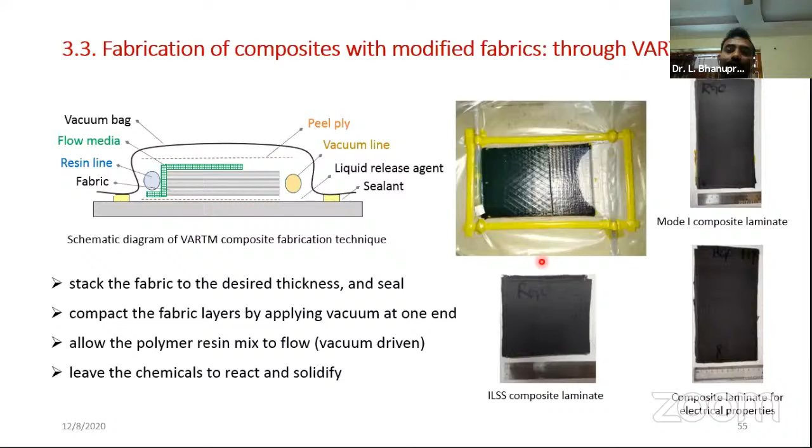Here we followed vacuum assisted resin transfer molding directly, where resin is driven from one end to the other. We tested for flexural strength and noticed a very good improvement of 25%, and we also tested with ILSS.

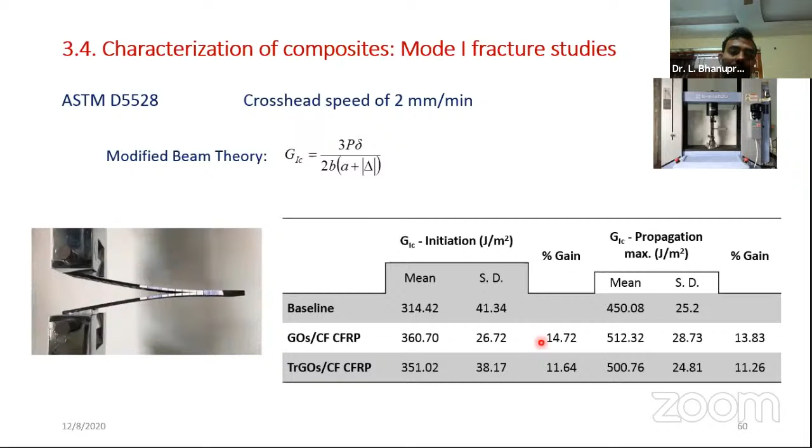In each and every case, we noticed very good improvement, but the fracture behavior is slightly different here because the matrix is plain, not matrix-modified; instead, the fiber is being modified. You can see the crack developed on the epoxy - this is plain epoxy, showing step-like cracking. If filled with a nanofiller, a different kind of failure can be expected.

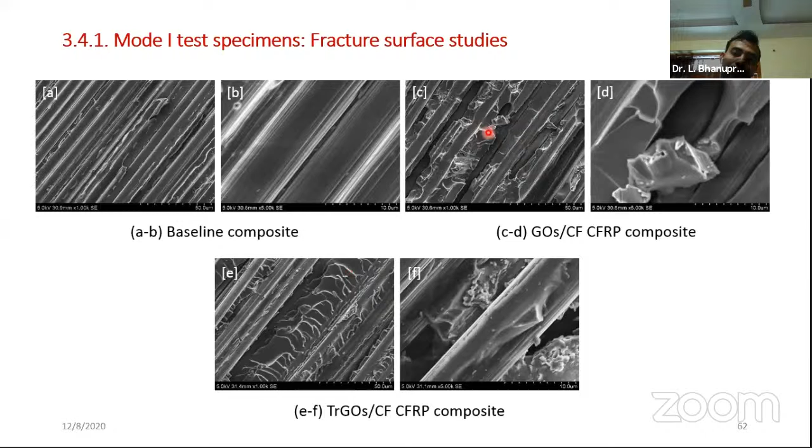But wherever fiber surfaces are present, the matrix is tightly bonded. You can see with the RGO coated carbon fibers very good adhesion, and in this case too, the matrix has been tightly adhered to the fiber surfaces. This is very clear from the fracture surfaces.

We also studied the electrical conductivity. We know graphene has very good electrical conductivity, so we expected this conductivity could improve further. This is very critical for aerospace applications because the outer surfaces of an airplane need to be conducting.

If the surface is non-conducting, lightning strikes will be concentrated at one particular area, eventually causing failure of the structure. So what they typically do is take a continuous conducting medium - a conducting wire or strip introduced onto the structure - so that whichever way lightning comes, it becomes a conducting medium and is transferred onto the ground. If you improve the conductivity of the composite material itself, the outer casing, you can eliminate that electrical strip.

In that regard, we carried out electrical conductivity measurements. Through-thickness properties improved by 127%, where through-thickness means the layer of polymer fiber through the thickness dimension. In-plane direction, carbon fiber is already very good at conducting, and there we noticed a minimal improvement of 15%.

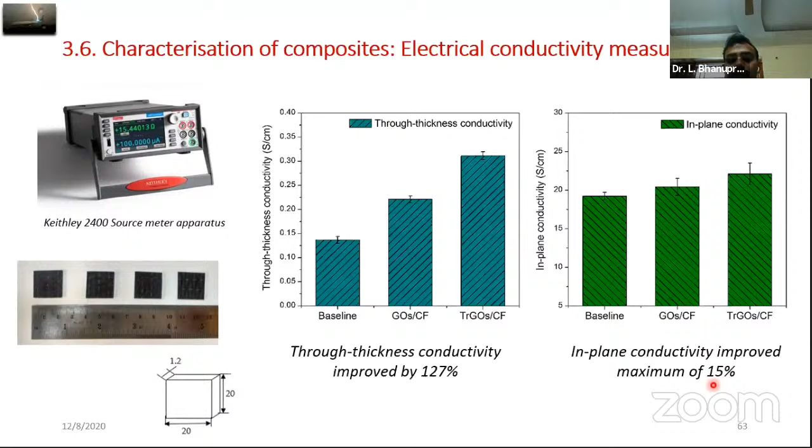This work has been published in Composites Science and Technology, and has already received more than 16 citations so far, having been published just last year. So we have plenty of opportunities in this particular area - depending on how you modify the fiber surfaces or treat the matrix material, you can come up with different combinations.